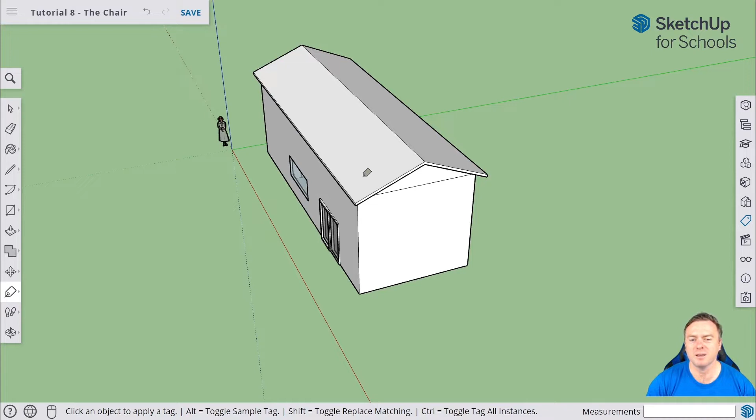So let's just get straight into it. Here's our tiny house that we've built before, and what we're going to do is build some chairs to put on our side table. If we use the tags button over here, let's hide some stuff. We're going to hide the walls first so we can see exactly what's going on. We can hide the roof from the previous tutorial, and let's get rid of that first floor as well.

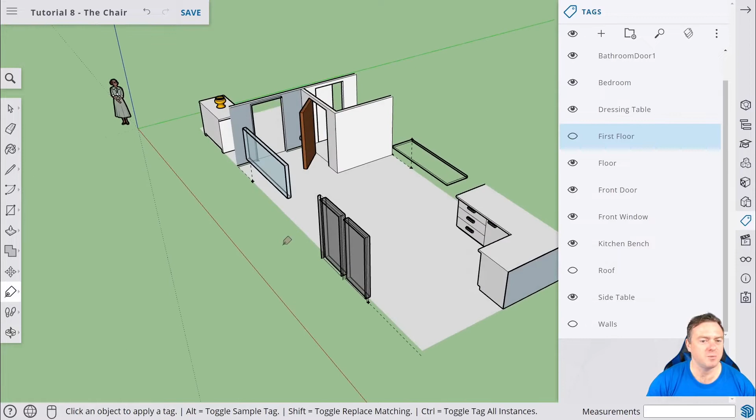So now we can see inside of our tiny house. We could get rid of other stuff as well, but that's fine. We're going to build this stuff outside here on the grass, and we're going to build a chair.

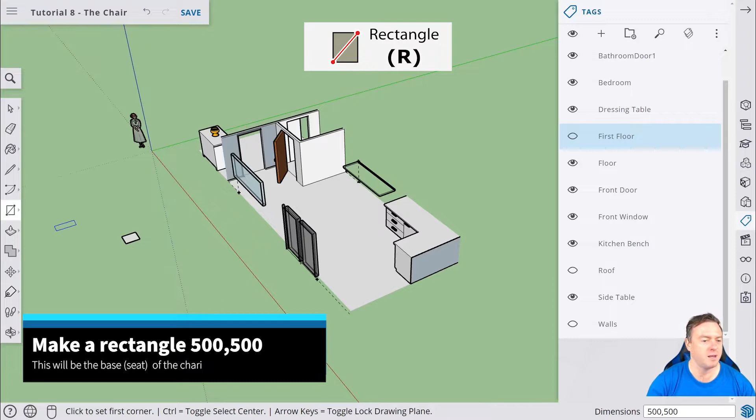So to start with, we need to click on the rectangle tool and just click anywhere out here. Now to make the base of the rectangle, we're going to make it half a meter by half a meter. Make this little cube, so we're going to go 500 by 500. So we now have this.

All right, awesome. So now we've got the base of what our chair is going to be all the way through. And you can be more complex with this, you could use the pen tool. There's a whole heap of other stuff that you could do to play around with this.

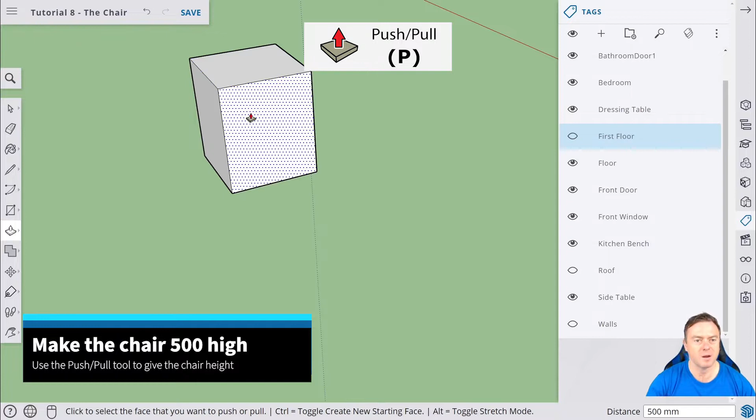We're then going to make the chair 500 mil high. So I'm going to click on that and type in 500. Right, so that's our cube. And then I'm going to show you a little trick that you can do underneath here.

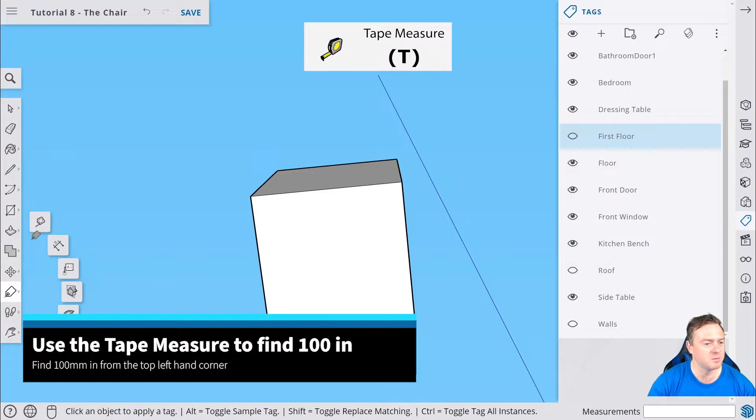So what we're going to do is we're going to zoom in, but we're going to come underneath the chair. And what we're going to do is we're actually going to draw out where the legs are going to be. So we're going to measure in from here how big our legs are going to be. So our legs in this case, let's use the measuring tool, going from this corner across, we want to be 100 mil.

So we're going to use the rectangle tool here and then click around, and we want to make that 500 by 300. So now we've built this negative space that we're going to cut in.

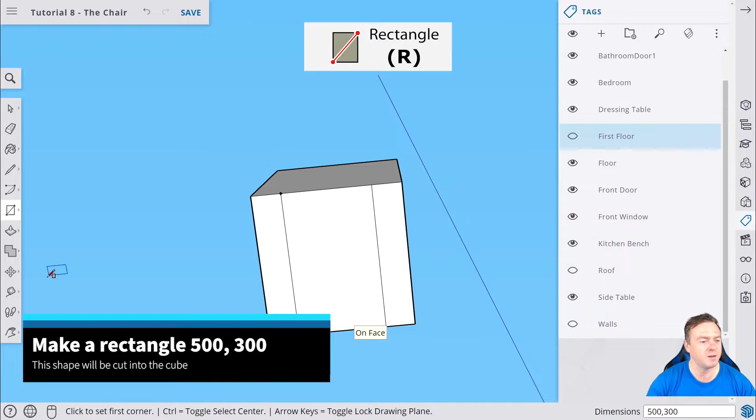We're then going to do exactly the same down this side. So we're going to measure in 100 mil, and just trust me with this, all will be revealed soon. So that's gone 100 down that way.

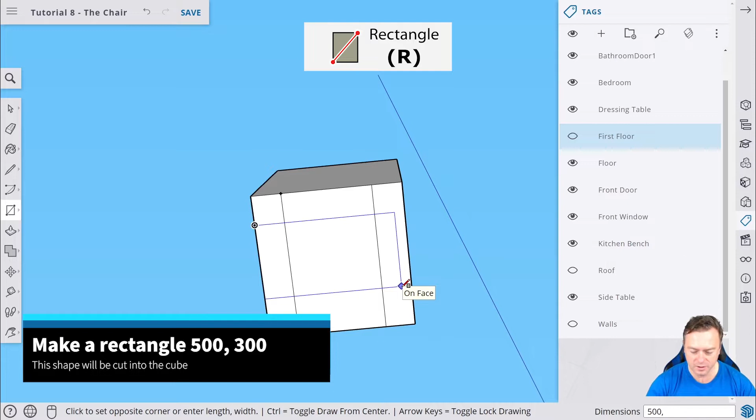We're then going to make a little rectangle this way across, and this time across we want to make this 500, 300. Now what you can see is I've actually made the 4 legs by making this negative space in the middle here.

So we're going to use the eraser tool now and clean this all up. So we're going to get rid of that, get rid of that, get rid of that, and then last bit, this. So we now have those 4 squares pretty clear with like a hospital kind of cross in the middle here.

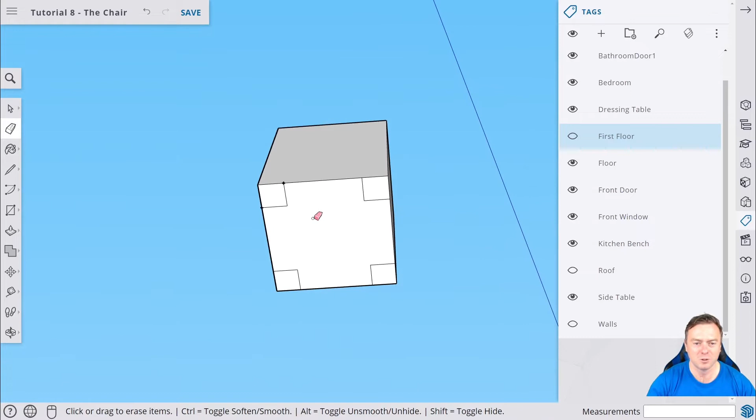Now here comes the trick. All we're going to do to cut the legs in, because we've got this base down the bottom here, is use the push-pull tool on this, and we want this to go up 400.

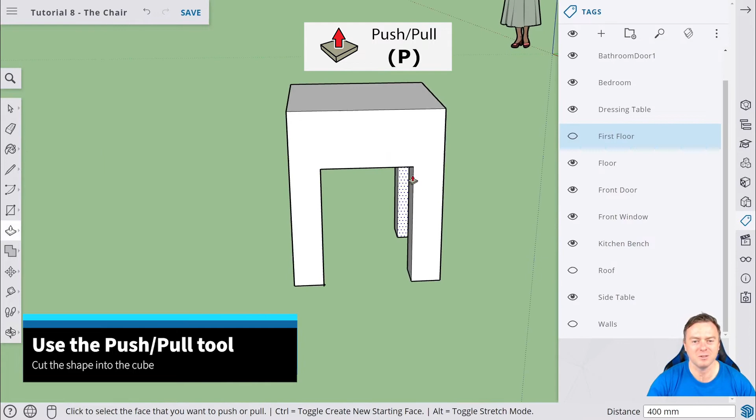So now I've built my legs. How cool is that? By using negative space instead of—I mean, you could go through and draw each one out perfectly, but I find by doing negative space, it just makes the process just that little bit faster.

Cool, so we've got basically a stool done. That would also work if you want to make it as a coffee table. There's a whole heap of other stuff that you could do with that.

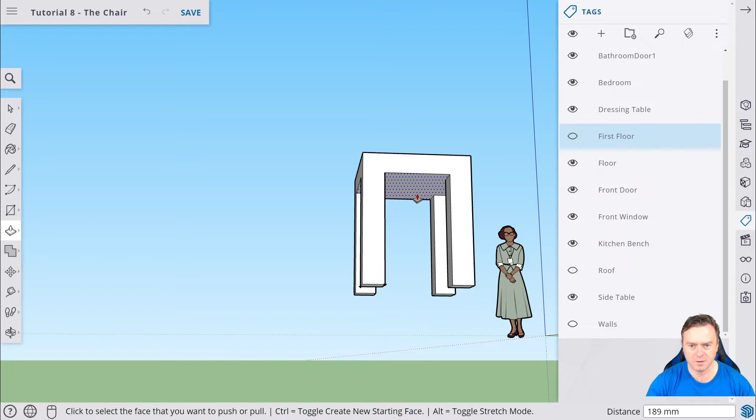Did I go up enough? Let's just go up another 100. There we go. So you can play around with that until it looks a bit more reasonable. I thought that looked a bit too big.

That's fine as well. So now what we're going to do is we're going to draw a rectangle from the corner in the back here, and we're going to make that 500, 100. Okay, we're then going to use the push-pull tool.

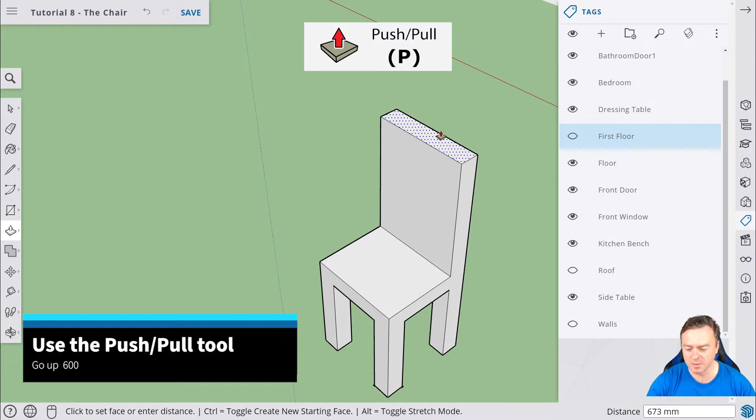We're going to bring that up and we're going to make the back of this bench—back of the chair, sorry—600. Okay, so we now have our chair. Cool, so you could be done there. I personally think there's some more that we can do.

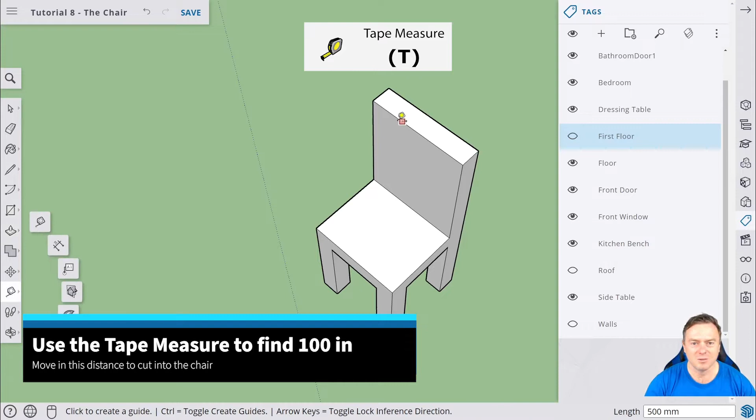So what we're going to do is we're going to actually put little cylinders behind the chair, just to make it look a little bit more fancy and show our skill set. So we're going to click on here, I'm going to move across, let's go across 100 mil.

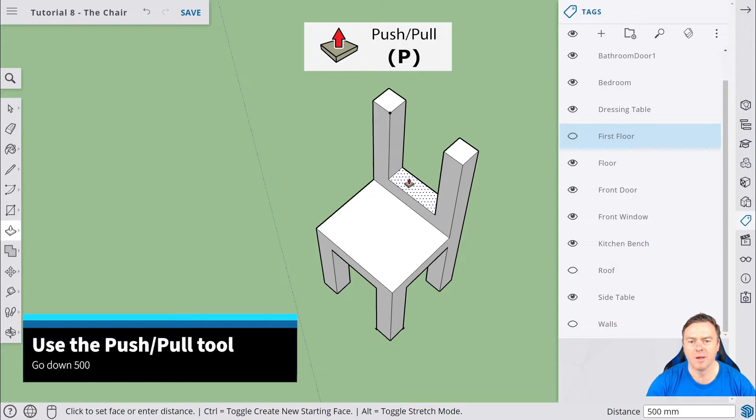Now let's draw a rectangle on the top here that we're going to cut into this top down. We're going to go across 300, 100. I'm going to use the push-pull tool and move that. We went up 600, so let's go down 500. So now we've got this bit in here.

Now what we're going to do is measure across and put in little cylinders across here. We know the distance from here to here, I think it's 300. Yep, so it's pretty much 300 across, which we did before. So we're going to measure off, we want to put 5 cylinders in.

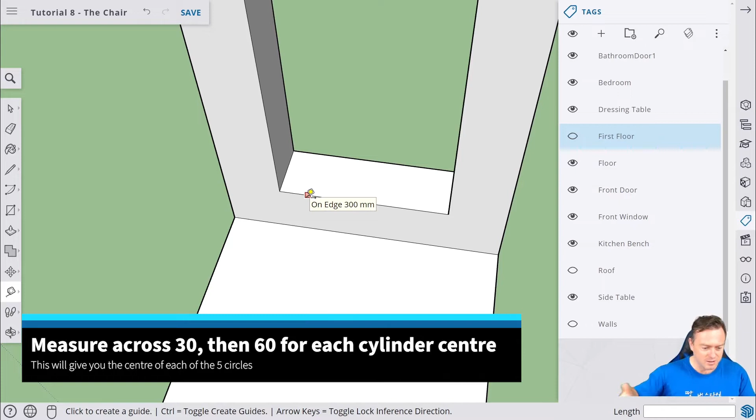We probably want to make the midpoint of each one 60 millimeters across. So the first one, the circle when we put it on the ground, will actually only be 30 across. We'll type in 30, and then we're just going to keep going across there. We've measured from midpoint in, gone 30 across. Then we're going to go across again, this time 60 across.

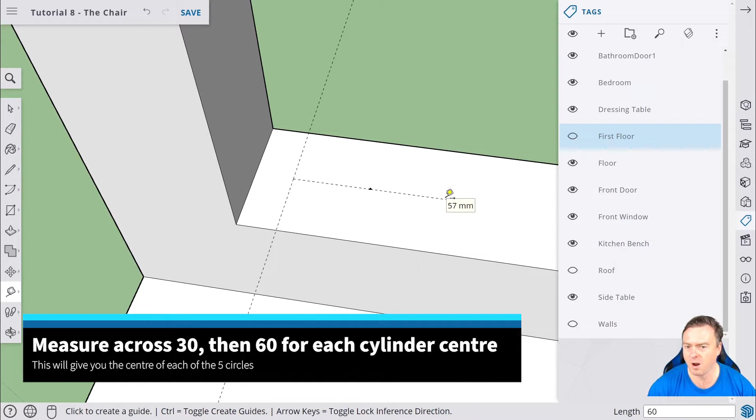Whoop, that hasn't kept the midline going. There we go, so 60. Then we're going to go across again, 60. Use the hand tool, come across, tape measure, 60, and then the last one, we're going to go across 60. Cool, so there's 1, 2, 3, 4, 5 little centers of these circles.

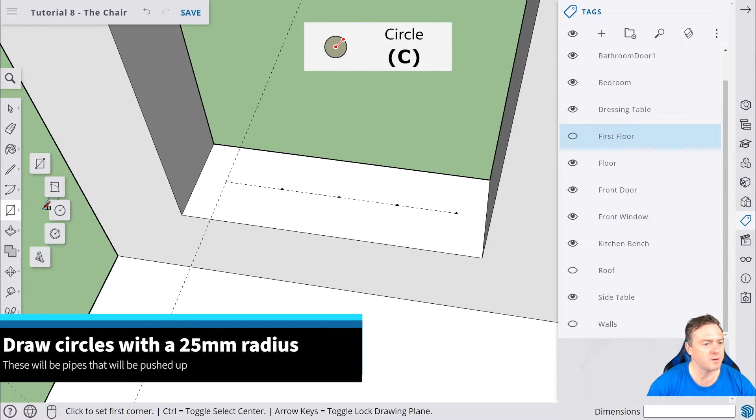So we're now going to draw the circles. Between each gap there's a gap of, was it 60? So the radius, if we make it less than 30, it should be all good. Just to prove to you, if we go there, see how 60 is way too big. So just to start off, we'll make these, let's say 25.

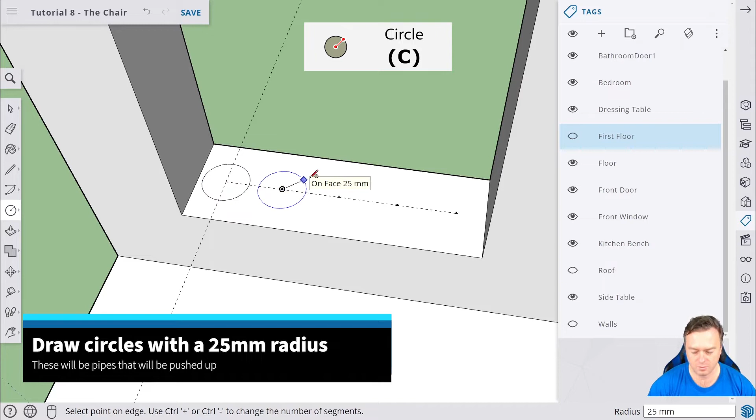Then we'll go again here, make that 25 again. And then we'll go here, make that 25. Looks like it's auto fixing because it's picked up the pattern that I'm doing. That's cool, so we'll type in 25, and then the last one down here, 25.

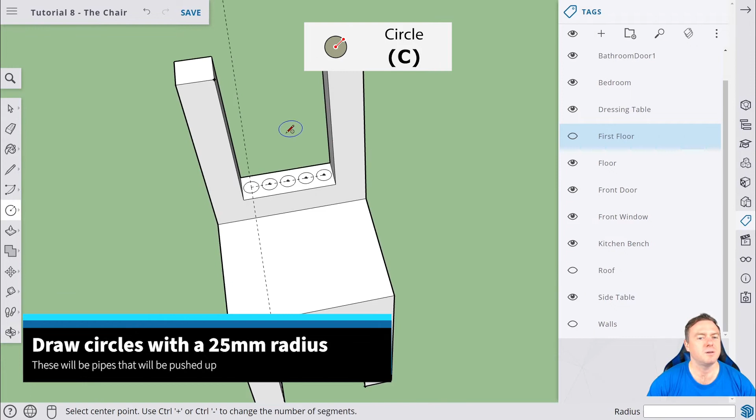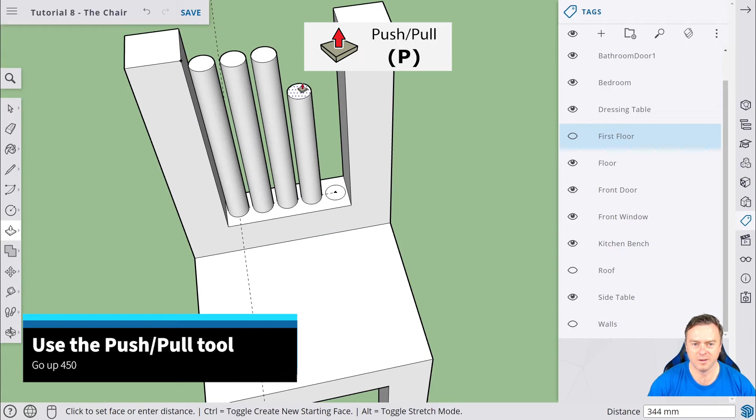Now that was 500 down that we went, so let's go 450 up. We use the push-pull tool and make each of these cylinders go up 450. So make that one go up 450, this one up 450, this one go up 450, this one 450, and this one 450.

Cool, so we now have that little bit more of a fancy sort of back that you can sort of see through, sort of like bars on a prison kind of thing.

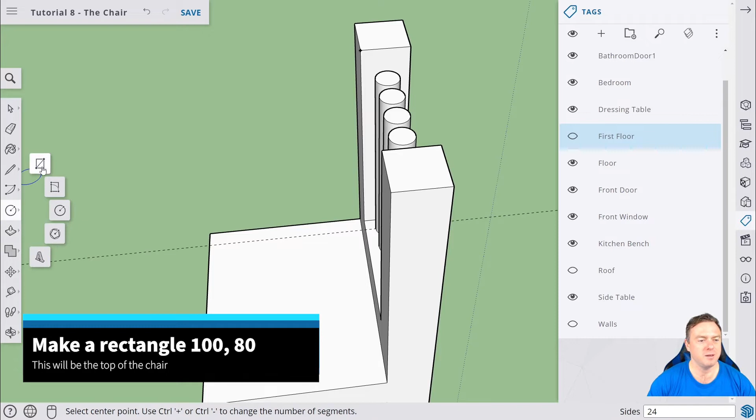So now we want to make the roof of this. Easiest way again, use the rectangle tool. Come across here, press R or press the rectangle tool, and we're going to go down that edge. Let's go 100 across and then only go 80 down this time, so there should still be an overlap, which it does. And then we use the push-pull tool, click on the face we just built, and push across here until it says on edge.

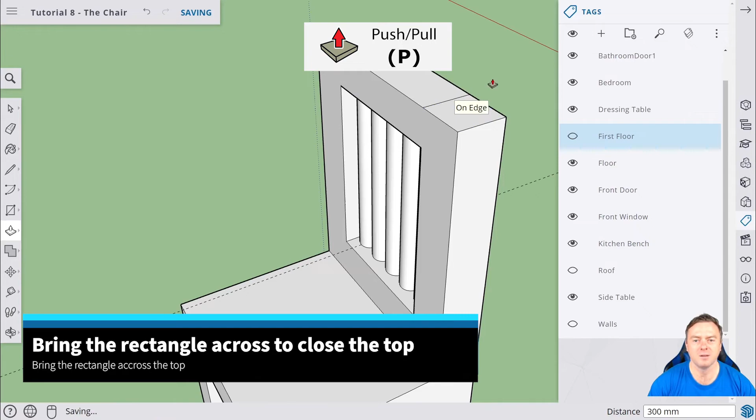So now we've built the rectangle together and cleaned this up. We'll just use the eraser tool and swipe through that. And now we're done, we've got our chair. We'll get rid of that guide line there just because it's a little bit extreme. And then, yeah cool, so now we can just select all that, right click on it, make a group. So we now have our chair.

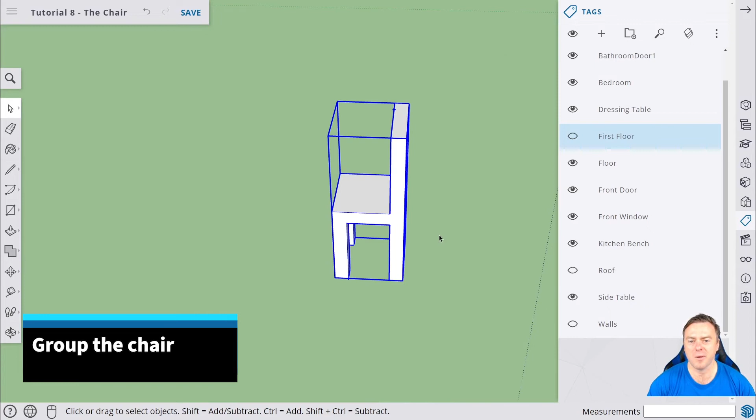Now let's put that into the actual room. We're going to put it underneath these side tables here, using the move tool. And before we put it inside, let's rotate it. Click on the corner here, see how it's got the blue protractor, so make it do a full 180. And then we'll click on this corner here.

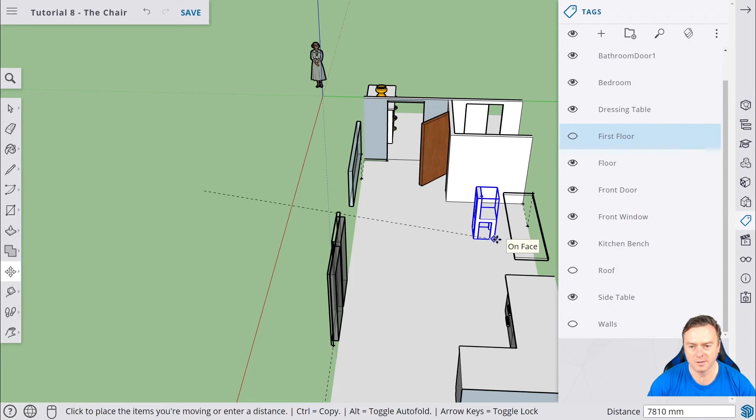And then we'll move him in, using the hand tool and the move tool again. And there's our chair done into our side table.

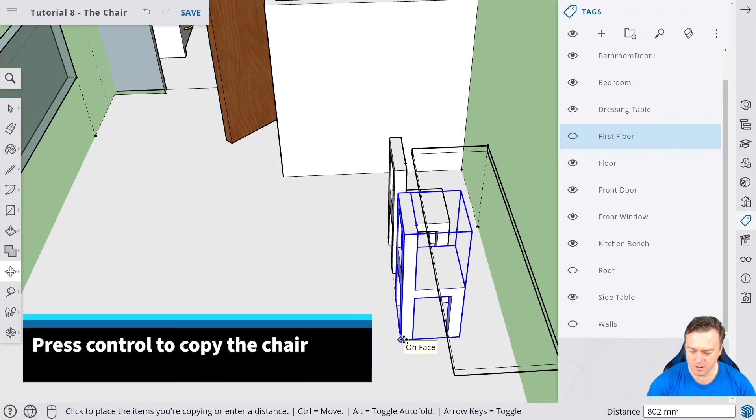Now if we want to build a couple of these, all we've got to do again is press on the move tool in the corner, press Control once for the duplication, slide it down. Let's slide him down that way, go 900 mil. Then we can do it again, press Control once, and we'll go 900 another time.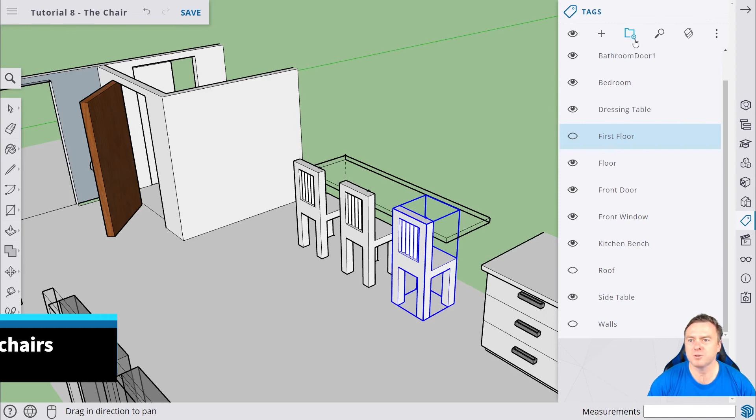Cool, so now we have our chairs in there. We should also tag this, so we'll go there, we'll go chairs. Click on the chair tag and then just go around and click on each one of those. So now we can hide the chairs.

So then if we put the walls back in and we zoom over here, we now have our side table with some chairs in it, which is pretty cool.